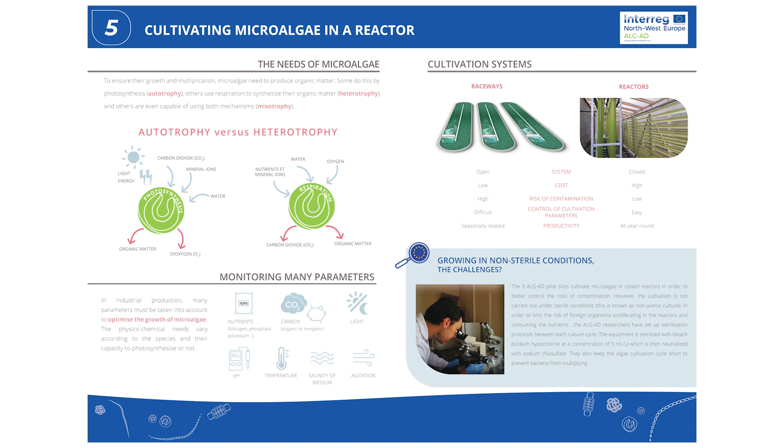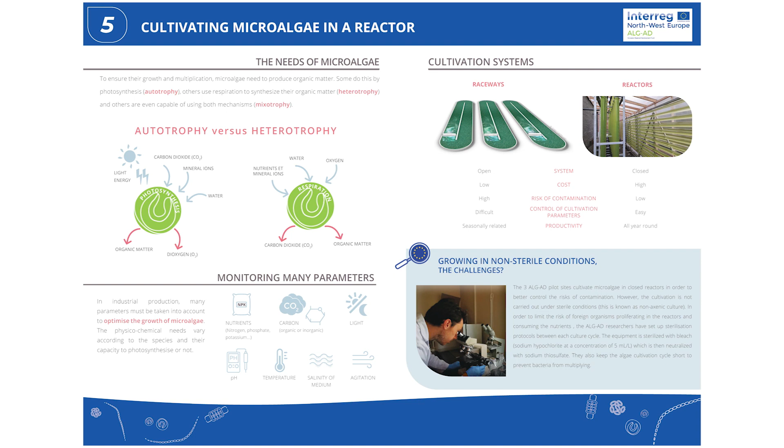For several years now, scientists and manufacturers have become increasingly interested in microalgae and their wide-ranging potential for application. Microalgae are already present in our daily lives in some cosmetic, pharmaceutical, and food supplement products. In the long term, and on a much larger scale, they could even represent an alternative to certain food ingredients, which would of course involve mass production.

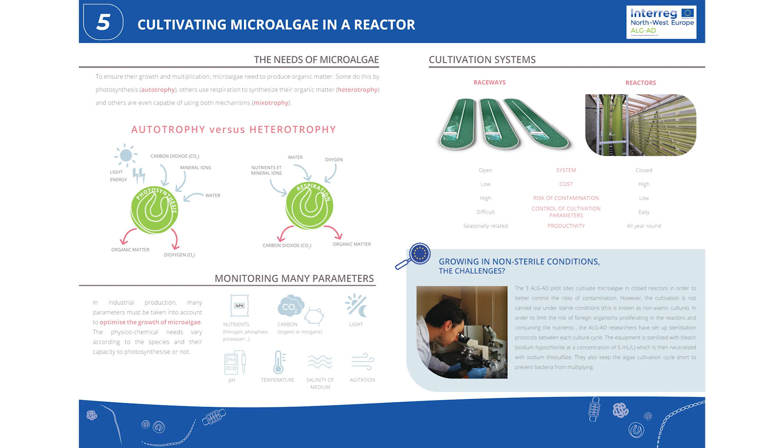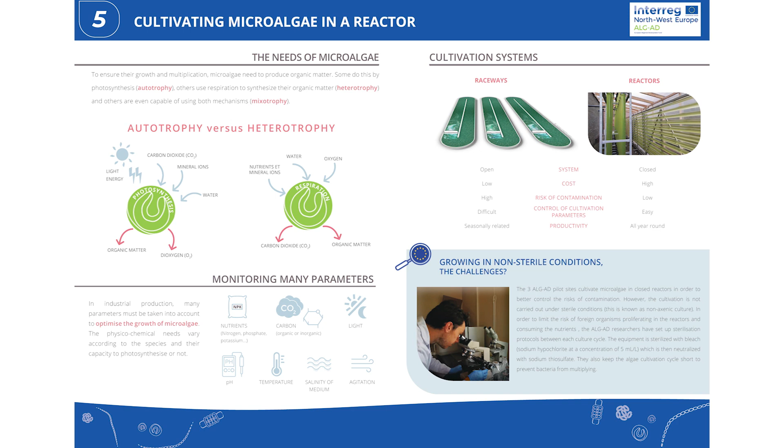As microalgae cultivation technologies emerge, it is therefore essential to find ways of mastering the techniques on an industrial scale. This is one of the aims of the ALG-AD project. Cultivating microalgae is a delicate matter because not all species of microalgae have the same physico-chemical requirements for development.

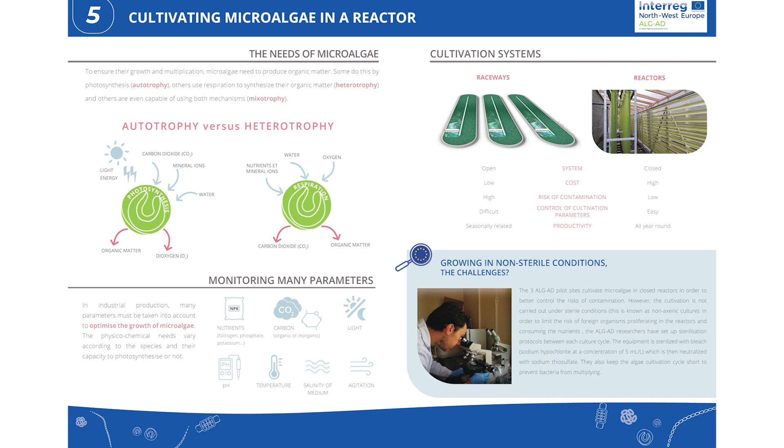Microalgae can call on different types of metabolisms to create the organic matter they need to grow and multiply. Autotrophy is the most common type of metabolism, where microalgae can use inorganic carbon in the form of carbon dioxide and light as a source of energy. Heterotrophy is where they assimilate organic carbon such as glucose in the absence of light. And finally, mixotrophy, where they are metabolized both autotrophically and heterotrophically.

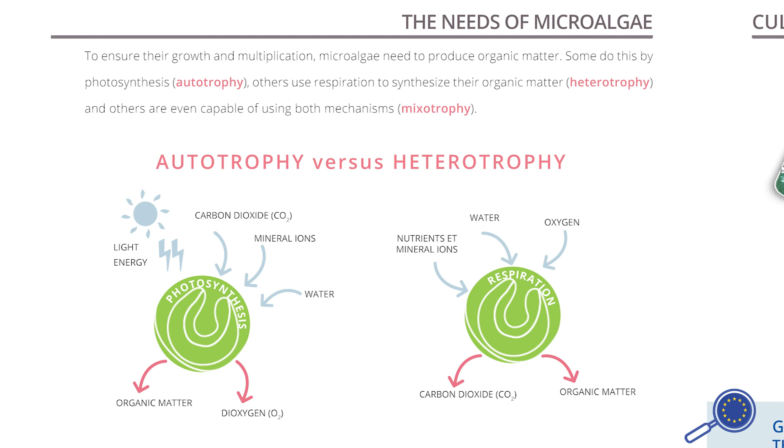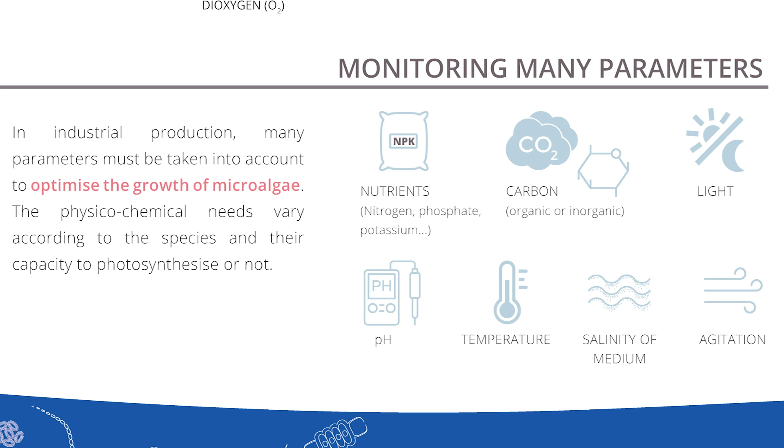Therefore, to cultivate a particular species of microalgae, it must be provided with the correct amount of light, nutrients, carbon dioxide and minerals, in seawater, freshwater or brackish water at a controlled pH and temperature. There are currently 2 cultivation methods which are selected according to the type of production required.

In open cultivation, the microalgae are placed in raceways or open ponds, where paddle wheels are used to mix the microalgae. Although this is an inexpensive system, productivity is impacted by the risk of microbial contamination, loss of water through evaporation, and seasonality. It is not easy to grow algae during a European winter, and the pond may have to be placed inside a greenhouse for protection. In addition, the cultivation parameters are difficult to control.

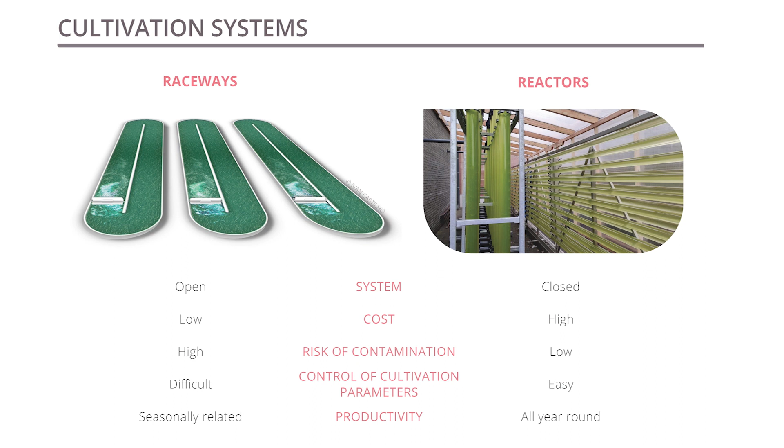In bioreactors, microalgae are placed in transparent, flat, cylindrical or tubular containers and are exposed to either sunlight or artificial light. This closed system, which is relatively expensive, makes it easier to control the cultivation parameters, and productivity is barely affected by external hazards. Each of the 3 ALG-AD pilot sites is focusing on a particular cultivation model with the aim of testing a maximum number of parameters under real conditions, including different types of digestate.

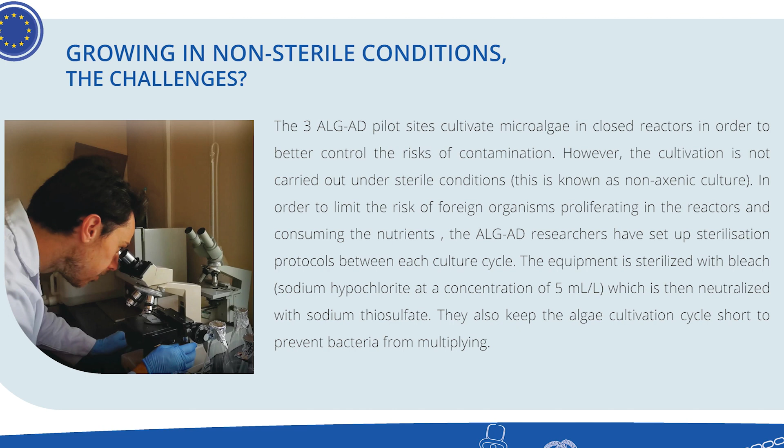On the Lombard pilot site in France, the heterotrophic microalga Aurantiochytrium mangrovei is cultivated in a 1,500-litre cylindrical reactor. These are all avenues that could potentially lead to the implementation of manufacturing solutions.